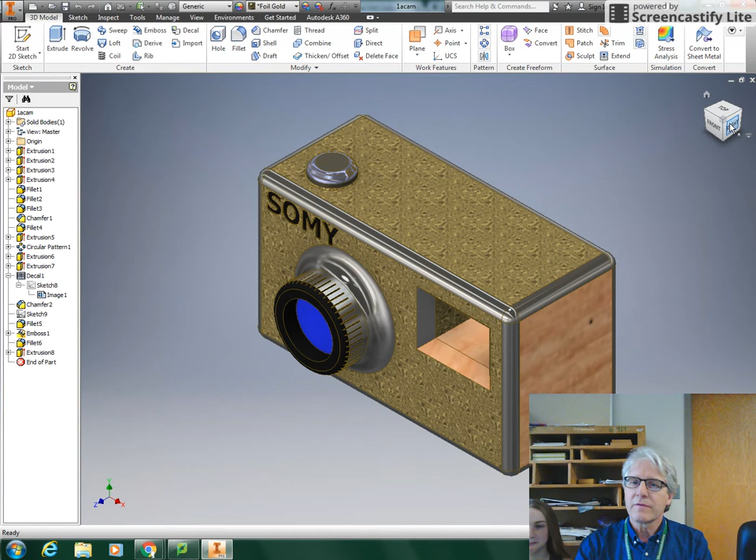So you can see now we've got a picture, we've got the circular pattern, we've got some text, and on the knob we've got the emboss. So this is the model, in the browser this is the model. You can highlight any one feature over here. If you open these little pluses, you can see the sketch, you can see the image, and you can always go back and edit any of those.

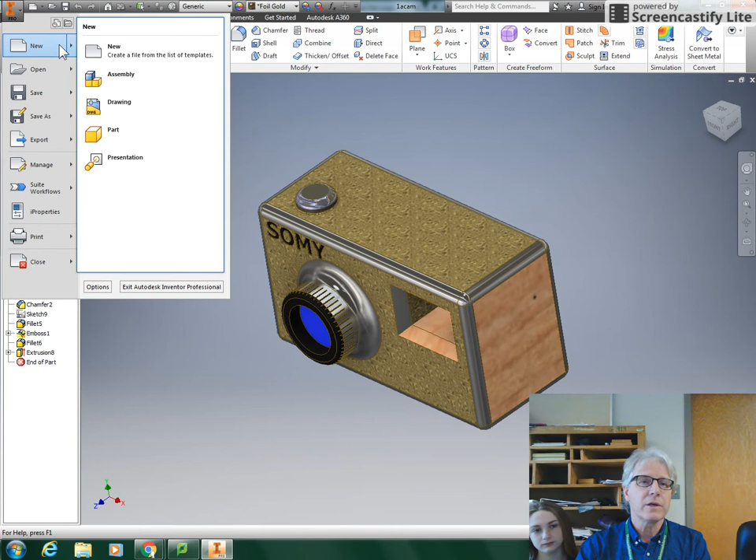Today we're going to do an Inventor IDW. So either we can go to here or go to New, Standard, IDW. What do you think that stands for? Inventor drawing. A drawing. Okay, this is take two, so that was easy.

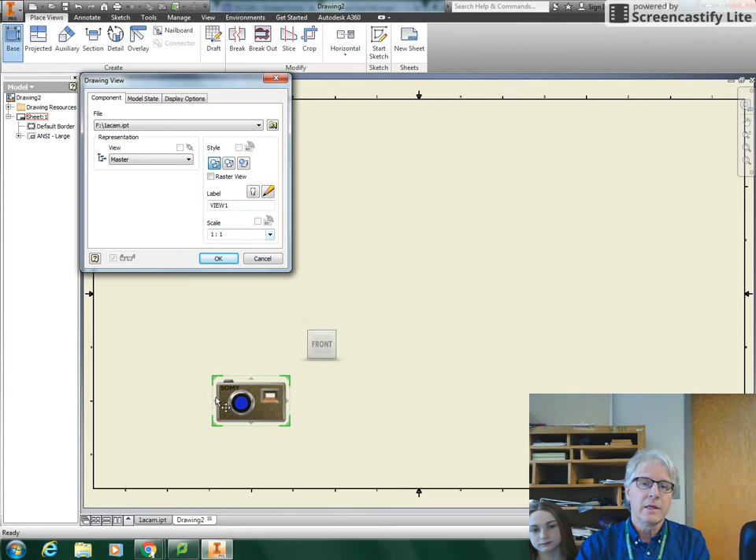So we hit create, hit OK, and we get a blank sheet of paper. Essentially you just hit number 2 on the green sheet, that's base view, and it sets up the base view there. Now, is this big enough? What do you think? Too small. So we need to make the scale a little bigger.

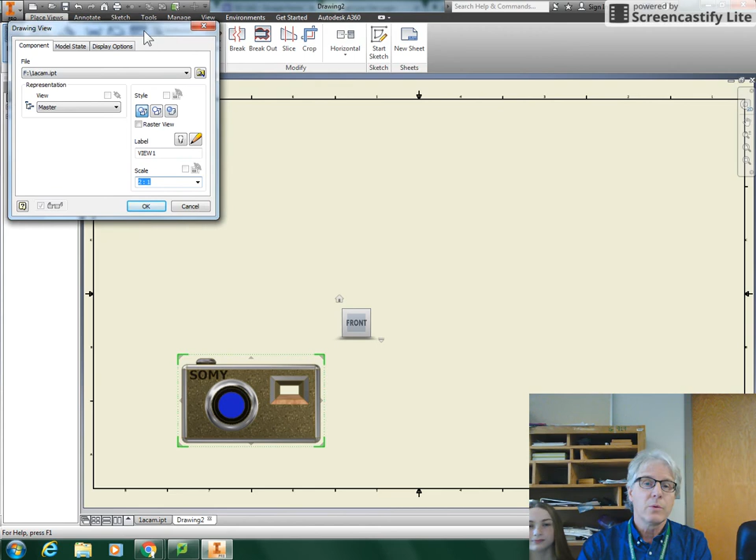And what's going to happen, we're going to get the front view and the top view. So I click for the top view, I click for the side view, and I click for the 3D view. Now, if you want a back view to show off the picture, we just hit OK here.

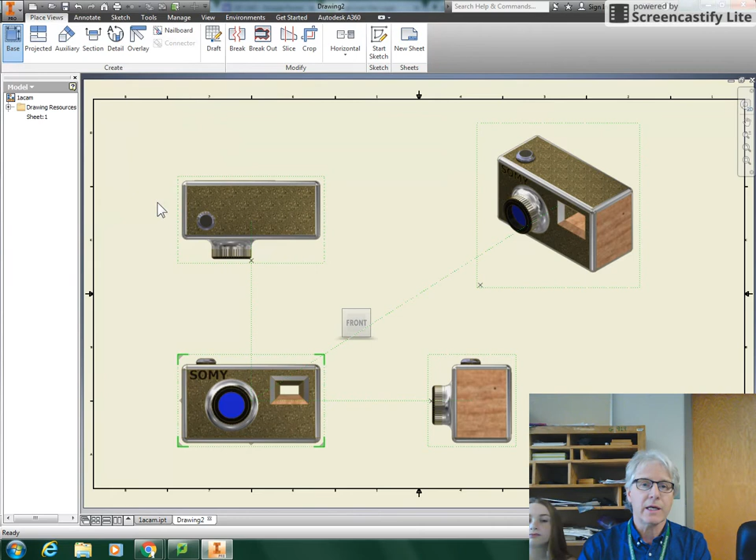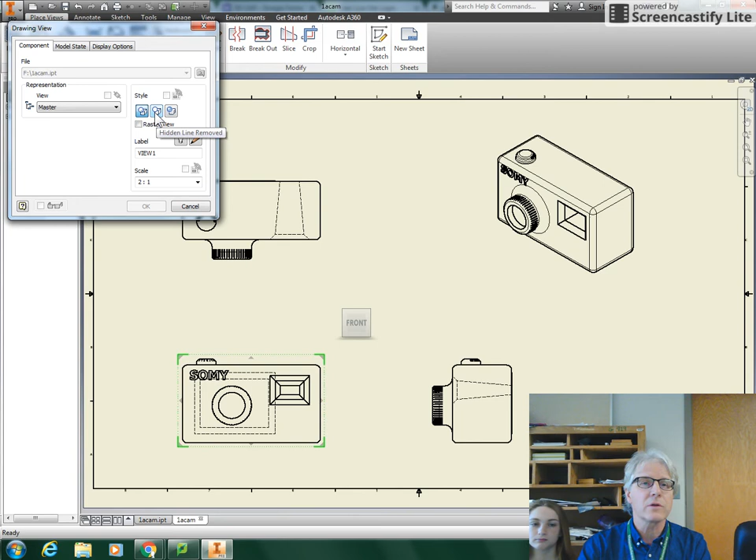So we got hidden lines, remove, shaded. So if I hit shaded, it does these three views. I'm going to just move this. So if you click on the green dotted border, you can move them anywhere. If you double click on the border, it takes you back to the styles. So this button here is styles.

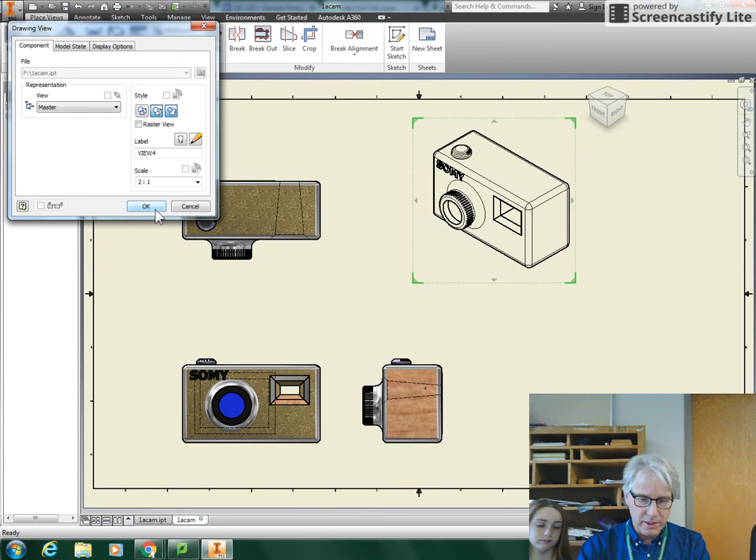And so that's really, we've really got up to number 4 and 5 there already. Now, if I want a back view, which you can show off your picture with, you go projected view, click on the side view, click for the projected view, right click, create.

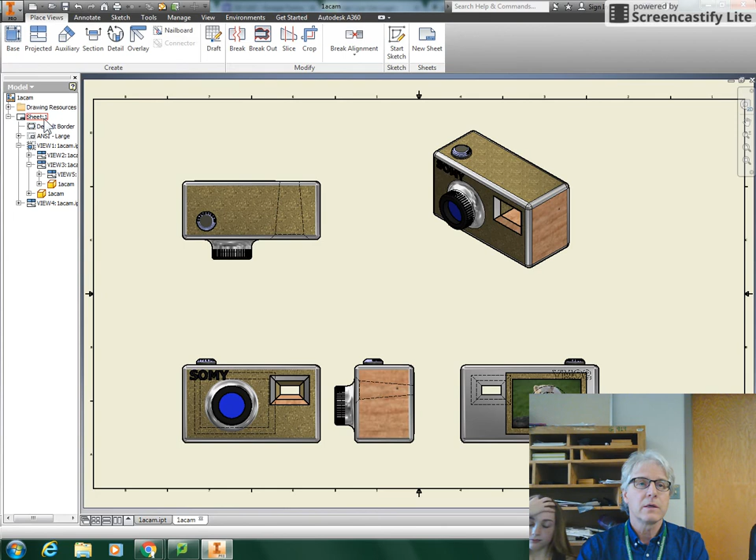Okay, so that's that. Once you've done that, of course, save as, and make sure you're saving into your F drive. It will save where your model was, and you can see that it actually sets up the name the same as what your model was. It's a different type of file, and I can hit save.

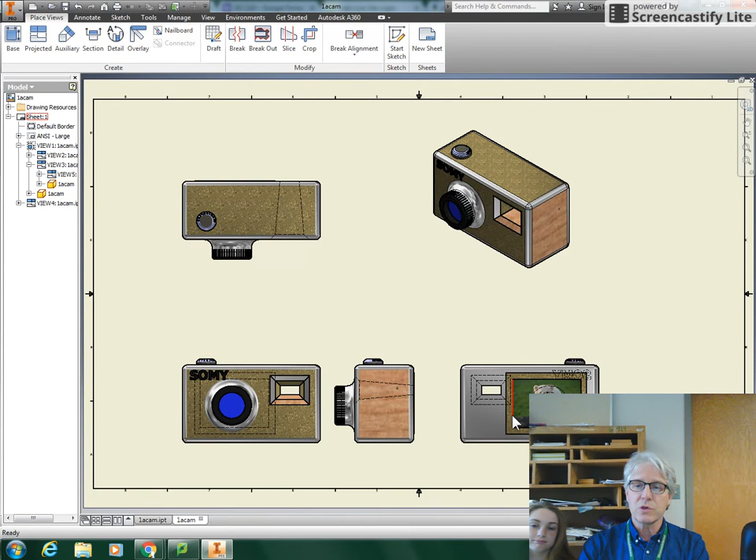The cool thing is you can zoom in on the drawing and see the details. The dotted lines signify hidden views.

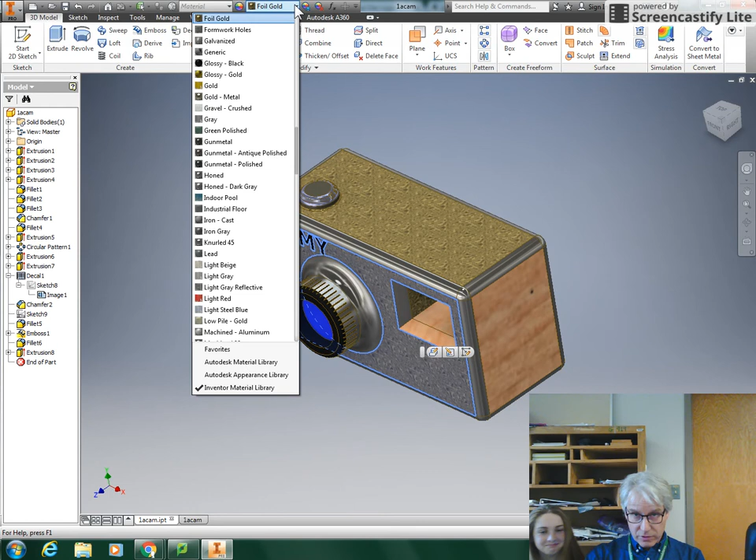And finally, here's the $100 question. If I change the model... either of you, what do you got, come a little closer. What do you think will happen to the drawing itself? If I change the front to gray, basically, what's going to happen to the model?

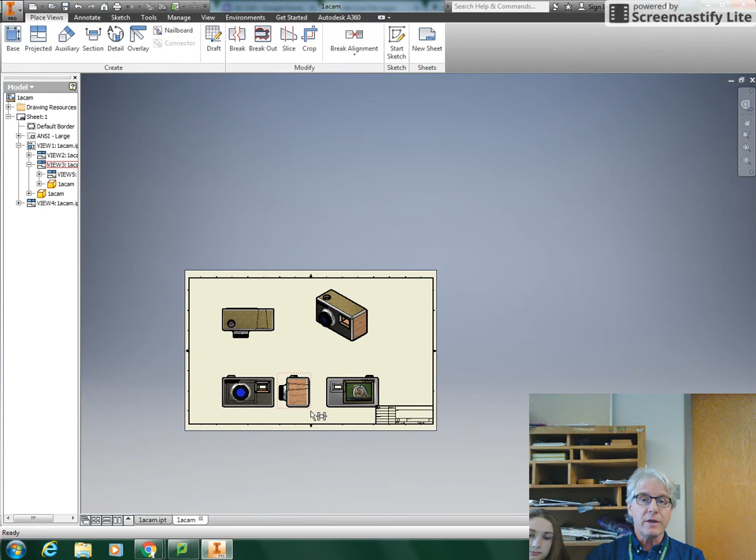It's gonna stay the same. The model, I mean the drawing. The drawing's going to change, is what you're saying. You agree? And that is right. So if I change the color of the model at all, the drawing will update itself automatically. And again, that's why the program is big bucks. It saves a fortune, when you make a modification, people get the right thing.

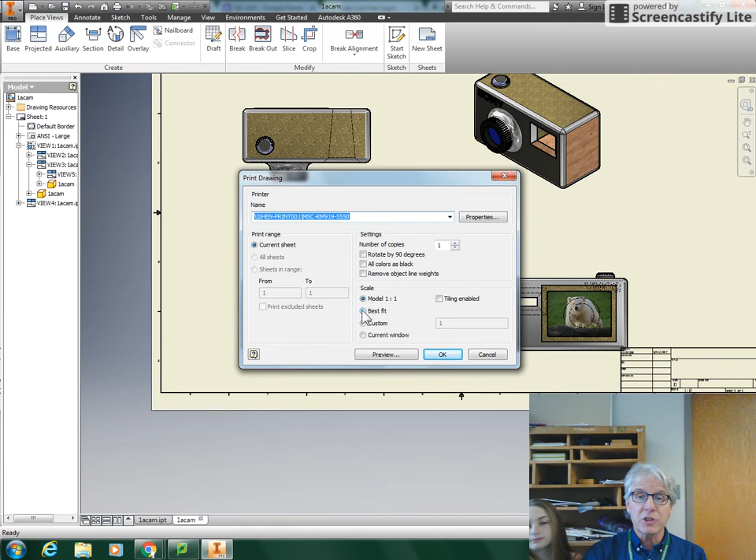Finally, printing. Now, we don't have access to color in this room, so we're going to go File, Print, and you should see MSC Room 919 5550. The main thing you have to change is best fit. You can go to preview, and once you've done that, that should really be a monotone black and white preview, because I'm on a black and white printer, and I print, and it should come out at the printer.

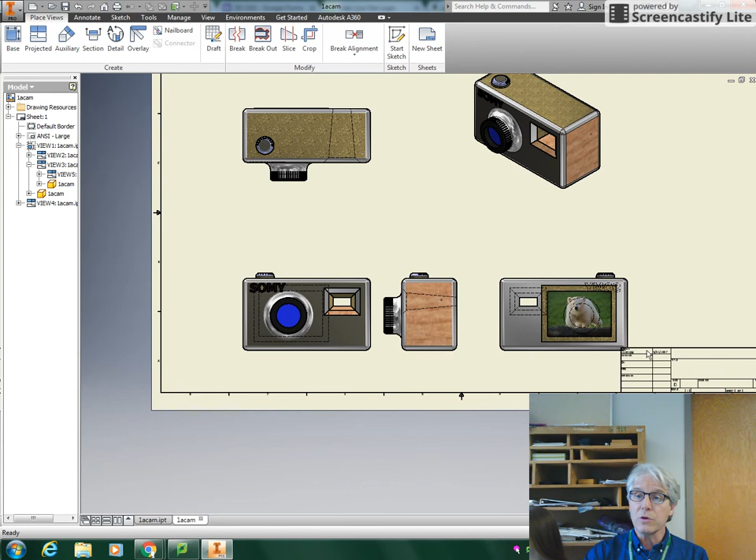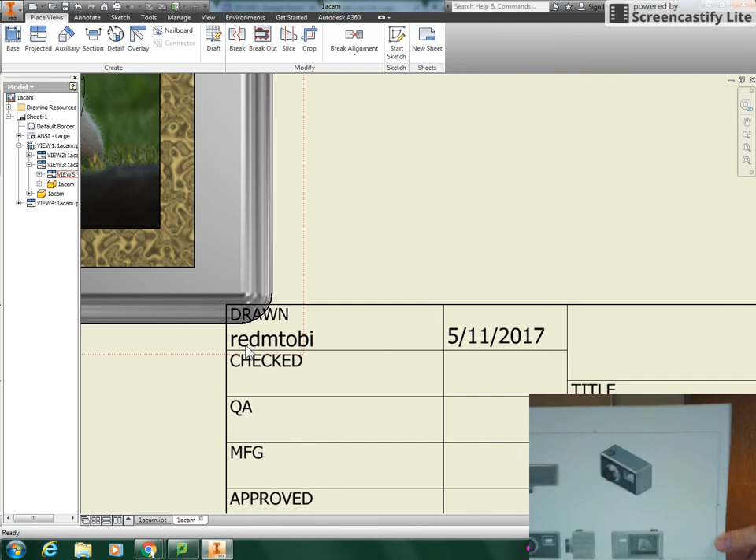Now, something to also notice here, it will show your username there. So you'll see drawn, and that gives you, and Neil, without being asked, has done that. And here is the drawing. So that is a real handy way. And of course, in industry, you could hand your design drawing to people and they could make what you've designed. So even in architecture, if you're using a different program, you design that stuff.

And these two have a few comments. Go ahead, what do you think? Come a bit closer, I think you're off the camera. You go first, what was the best thing about that?

I liked how it automatically, if you changed it, it changed the drawing. Yeah, that's cool. Yeah, Neil? Same, I like the same.

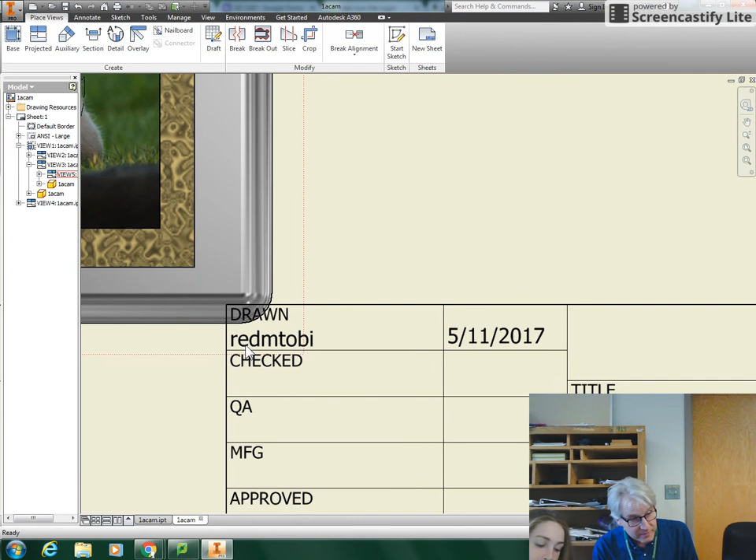What's the worst thing? Yeah. The worst thing, I don't know, if there is a worst thing for me. It's a little tricky with scale and tone, but those are the only two things.

So go ahead and try that. It doesn't matter whether you're finished or not, because of course the drawing is based on the model.